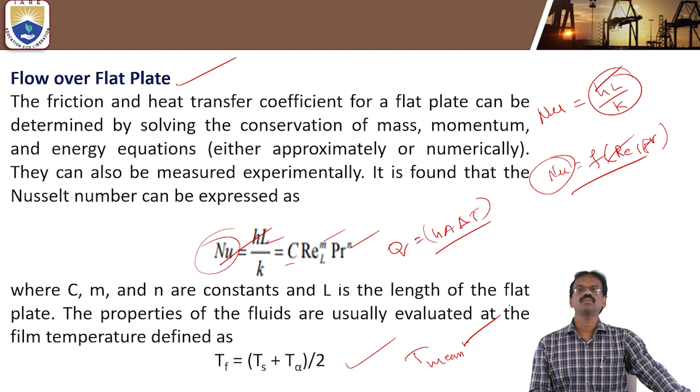So finally, Nusselt is the constant C Re to the power of m Pr to the power of n. So C, m, n are the constants. L is the characteristic length, which also depends upon the geometrical construction. Next, by using the temperature of the solid surface and the temperature of the fluid, we can find out the T mean. By using this T mean, we can take the properties of the fluid at that temperature. So you'll see some formulas here.

Based upon the Reynolds number, if the flow is on a flat plate and the Reynolds value is less than 5 into 10 to the power of 5, that shows laminar flow. If it is greater than 5 into 10 to the power of 5, that shows turbulent flow. So based upon the flow, the C, m, n values are different. If the flow is laminar, this is the formula.

Nusselt of x is equal to hx by k, where x is the distance from the starting point. If you take the full length L, the formula is just double this one. So hx by k is equal to 0.332 Re to the power 1 by 2, Prandtl to the power of 1 by 3, if the Prandtl is greater than or equal to 0.6. This is the coefficient of friction formula; we have to remember this one. Here x is the distance from the leading edge. Remember, the starting point is the leading edge.

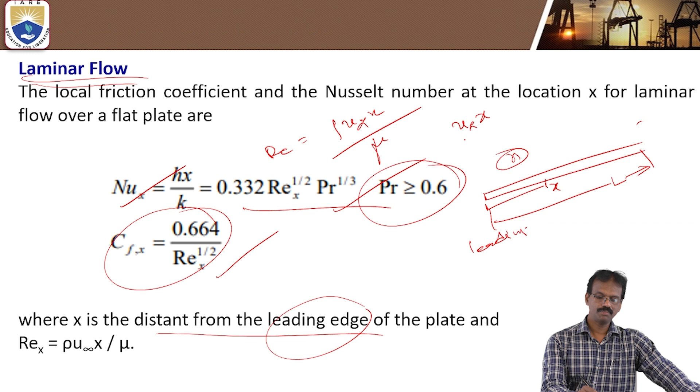Then Reynolds number Re is equal to rho u infinity x by mu, or u infinity x by nu, where nu is the kinematic viscosity. These are the formulas you have to remember. If you consider the full length of the plate, the average friction coefficient and Nusselt number formula is double that one. So Nu is equal to 2 into Nu x.

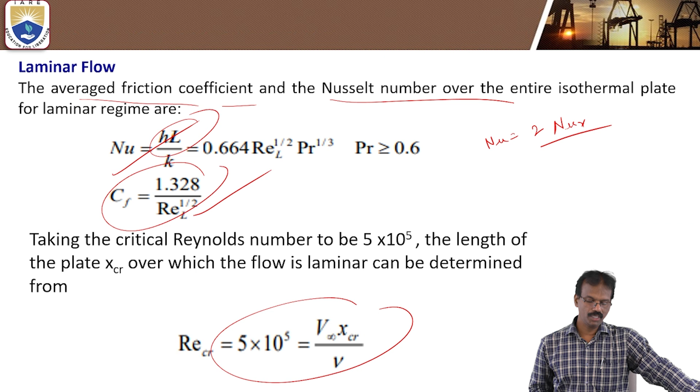Next is the coefficient of friction formula. This is the critical Reynolds number, mainly for the flow on a flat plate. Based upon this critical Reynolds number, you can identify the type of flow. This one is turbulent flow. If the flow is turbulent, the formula is like this. If the Reynolds value is greater than 5 into 10 to the power of 5, in between 5 into 10 to the power of 5 and 10 to the power of 7, you can take these formulas. All the formulas are available in the data book; you can refer to them.

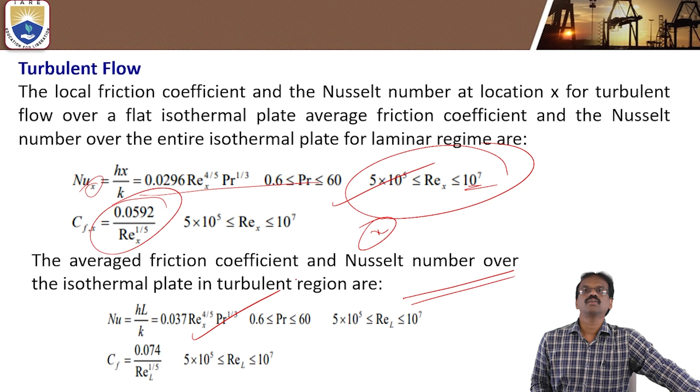For the coefficient of friction formula, for x distance, you can take this one. For the average friction coefficient over the full length for turbulent flow, you can prefer these formulas. Okay. So we will see a few numericals based upon forced convection, then we conclude this lecture.

The first one is engine oil at 60 degrees flowing. So the engine oil temperature has been given, that is the fluid temperature, T infinity, equal to 60 degrees Celsius. It flows over a 5-meter long flat plate. So the length of the flat plate has been given, 5 meters, whose temperature, the solid temperature Ts, is equal to 20 degrees Celsius.

Here TF is greater than TS, so heat transfer takes place from this fluid to the solid. The velocity is also given. If the velocity U infinity has been given, you can understand that the flow is forced convection. Okay, so that is forced convection.

In forced convection, we will see velocity. In natural convection, we will see the buoyancy effect. If the velocity has been given, we can understand that it is forced convection. The velocity is 2 meters per second. Then you have to find all the parameters. According to Newton's law, determine the rate of heat transfer.

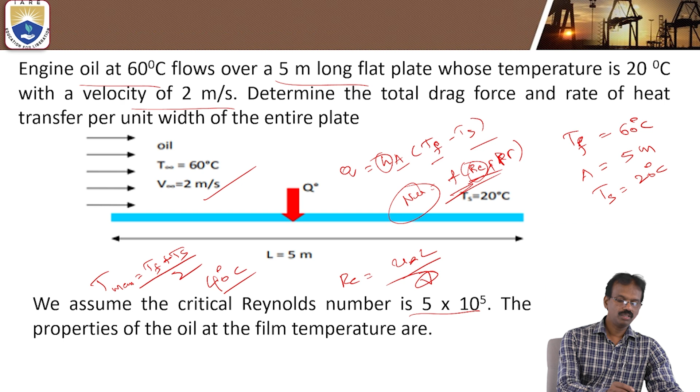You don't know nu, the kinematic viscosity, so you have to take the properties from the data book with respect to T mean. So first find T mean. T mean is equal to TF plus TS by 2, which means 60 plus 20 by 2, which is 40 degrees Celsius. At 40 degrees Celsius of engine oil, we have to take the properties.

Here you have the properties. This is the T mean, and with the help of the data book we can take the properties of engine oil at 40 degrees Celsius. Rho, the density of the fluid, is 876 kg per meter cube. Thermal conductivity of engine oil. This one is the Prandtl value; otherwise, we can use mu Cp by K to find the Prandtl number, or take the value directly from the data book. This one is the kinematic viscosity nu.

Then you have to find the Reynolds value. The Reynolds formula is U L by nu. U is the given velocity, 2 meters per second, and L is 5 meters long, divided by the kinematic viscosity 242 into 10 to the power minus 6. So the value is 4.14 into 10 to the power 4.

This is less than 5 into 10 to the power 5, which is the critical Reynolds number. So you can understand this is a laminar flow, since it is less than the critical Reynolds number. Thus we have laminar flow.

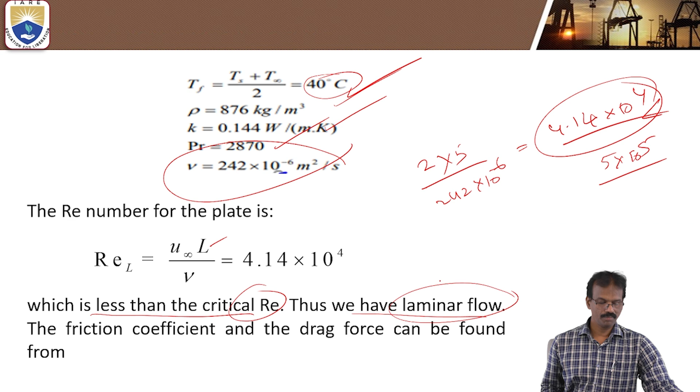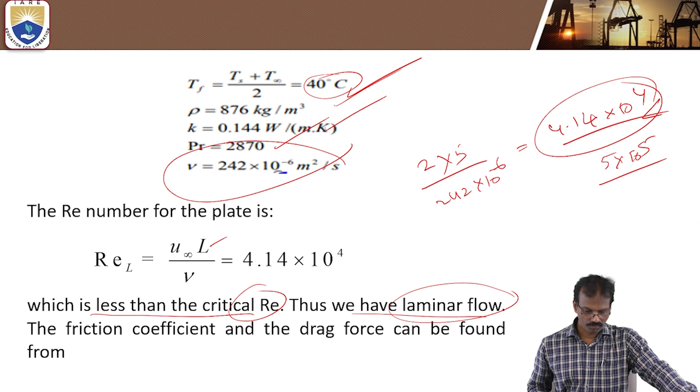Based upon the laminar flow, you can find the drag forces and the Nusselt values. For the drag force, the coefficient of friction formula is CF equals 1.328 by root of Re. Using this formula you find the coefficient of friction, and then the drag force FD. FD is equal to half of coefficient of friction into density into area into velocity square.

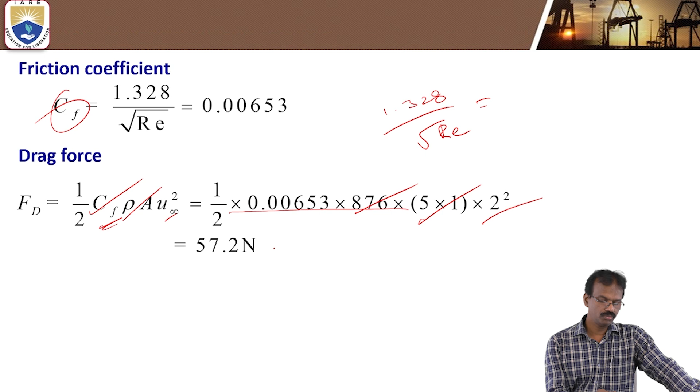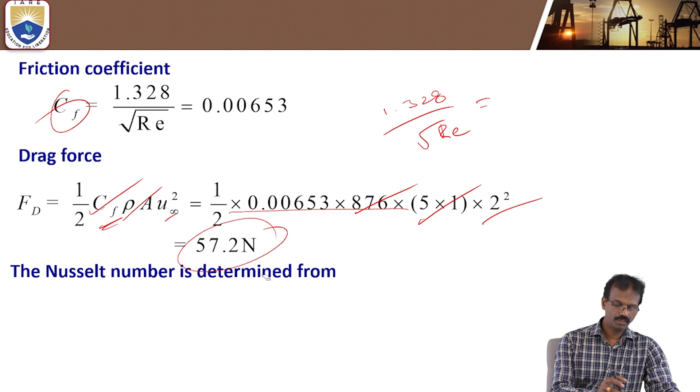If you substitute all the values, coefficient of friction, density, area 5 into 1, and velocity square, you get the drag force value, 57.2 newtons. Now we'll see the Nusselt number. If you know the Nusselt number, you can find the H value, the heat transfer coefficient, and from that the rate of heat transfer.

The Nusselt formula for laminar flow over the full length: Nusselt is equal to HL by K equals 0.664. For full length, X is equal to L. If you take a particular length X, then it is 0.332. For full length, 0.664 Re to the power 1 by 2 Prandtl to the power 1 by 3. You know the Reynolds value and the Prandtl value, which we have taken directly from the data book.

So the Reynolds value you already determined. If you substitute all the values, then you will get the Nusselt value. So the Nusselt value is equal to 1918. If you know the Nusselt value, then you can find out hL by k. This is the formula. By using this one, you can find out the h value, because L is the given length. Length is equal to 5 meters.

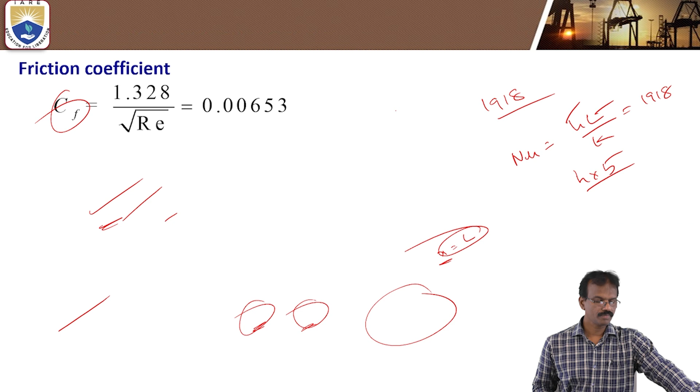You know this one. So h into 5 meters by thermal conductivity, also given. So in the data, the thermal conductivity is equal to 0.144. So you can take this one. Okay. So if you substitute all the values, the Nusselt value, L value and k value, then you can find out the h value. If you know the h value, then you can find out the rate of heat transfer.

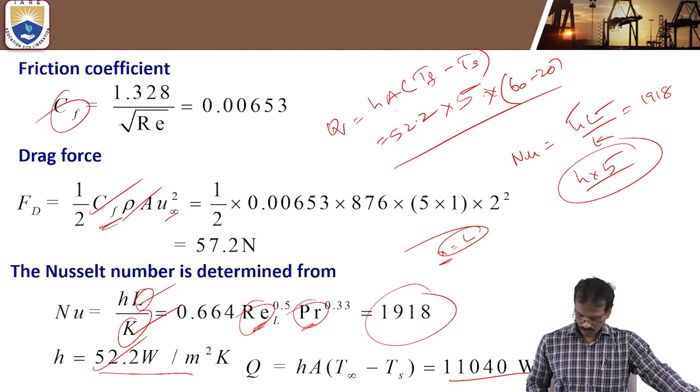Q is equal to hA into temperature difference. So temperature difference is nothing but T fluid, the maximum temperature, minus the low temperature Ts. So then you can find out: h is equal to 52.2, into area, which is equal to 5 into 1, into temperature difference. So temperature difference is equal to 60 minus 20. And you can find out that is nothing but 11040 watts. Okay. So in this way, you can solve the different numericals.

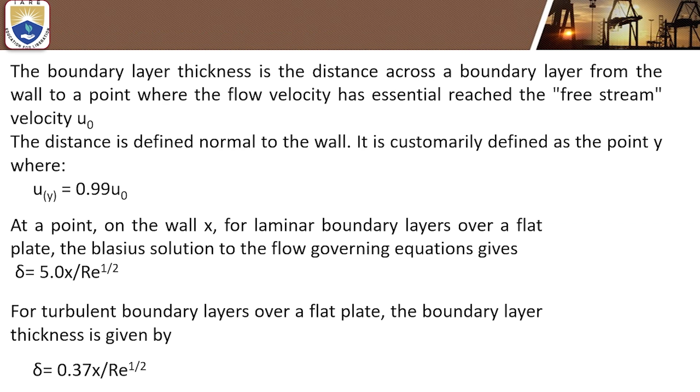Okay. We'll see boundary layer thicknesses. What is a boundary layer? Thicknesses we already discussed in the previous class. Two types of boundary layers. One is the velocity boundary layer, represented by delta. Another one is the thermal boundary layer, represented by delta T. Okay. So these are the formulas. Delta is equal to 5x by under root of Re. If you know the Reynolds value and the x value, x is sometimes a particular length, or we can take the full length also. So 5L by under root Re. By using that formula, you can find out the velocity boundary layer thickness.

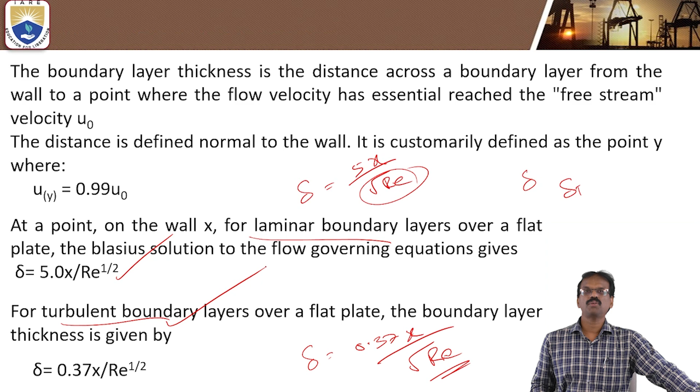Okay. So for the thermal boundary layer thickness, this is the formula for laminar flow, and this is the formula: delta is equal to 0.37x by under root Re. So this is the formula for the turbulent flow. Okay. So we'll see one more numerical which is based upon the thermal boundary layers.

So air at 20 degrees Celsius flowing over a heated flat plate at 134 degrees Celsius with velocity 3 meters per second. The plate is 2 meters long and 1.5 wide. So the area is 2 into 1.5. Calculate the thickness of the hydrodynamic boundary layers. So first of all, you have to find out the Reynolds number. Then you can identify the type of flow, laminar flow. For laminar flow, 5x by under root Re. So this is the boundary layer.

Otherwise, 0.37 into x by, and this is for the turbulent flow. This is for laminar flow. Okay. By using this one, you can find out the hydrodynamic boundary layer thickness. Okay. So this is the numerical. The temperature is also given, and at 40 you have to calculate the skin coefficient of friction, CFx.

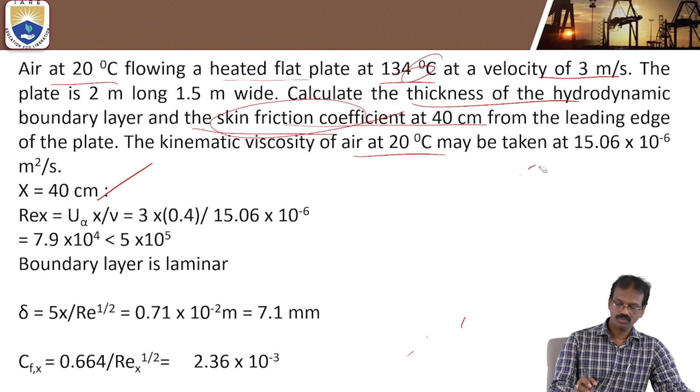Okay, we will see. So x, the distance given, is not the full length. You can take x equal to 40 centimeters. At 40 centimeters from the leading edge, you can find out the Reynolds value. So this is the plate. The profile is like this one. At distance x, x is equal to 40 centimeters, here you have to find out the Reynolds value. The formula is u infinity into x by nu. You know the velocity, and x equal to 40 centimeters means 0.4.

So kinematic viscosity, you can take the properties from the data book. Otherwise, the kinematic viscosity value is also given here, 15.06. You can use that formula. So the boundary layer is laminar because the value we got is 7.9 into 10 to the power of 4, which is less than 5 into 10 to the power of 5. So this is laminar flow. For laminar flow, the formula is 5x by under root Re. If you substitute the values, you can find out the boundary layer thickness.

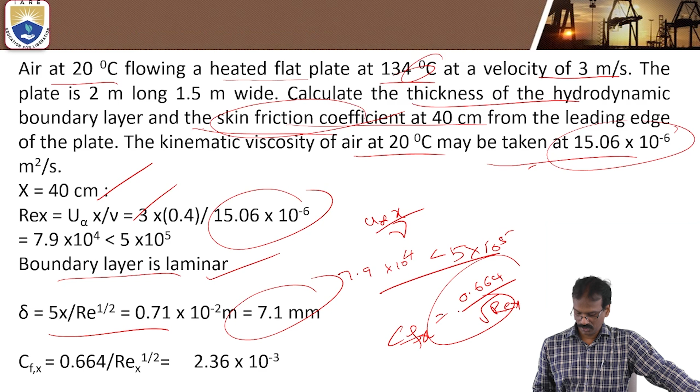Then you know the formula for the coefficient of friction CFx. CFx is equal to 0.664 by under root Rex. Okay. By using this formula, you can find out the coefficient of friction. So in this way, one more numerical is also given. You can refer to this one. Okay. So these are the different textbooks. You can refer to the textbooks to solve more numericals based upon forced convection.